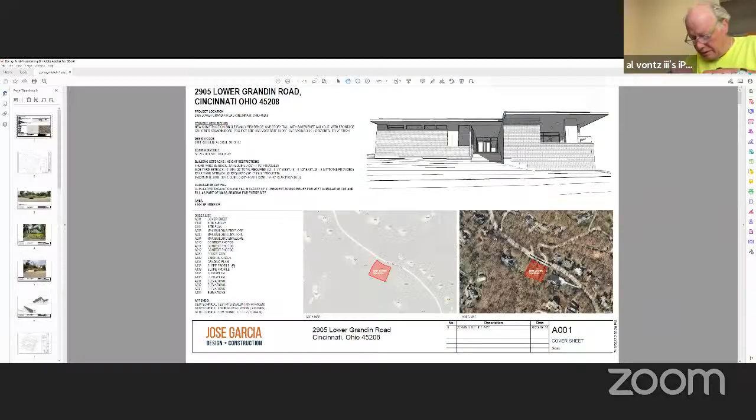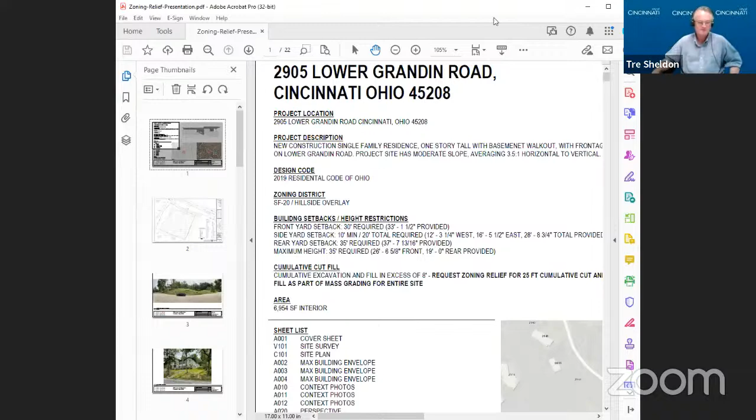Do you all see my PDF being shared currently? Yes. Yes, I do. Yes, we can.

Again, my name is Noah Schroyer, an architect at Jose Garcia Design and Construction, and the project manager for this project at 2905 Lower Grandin. We are respectfully requesting relief from 1433-19G, the 8-foot permitted cut and fill requirement, as adhering to it would make the site unviable for construction.

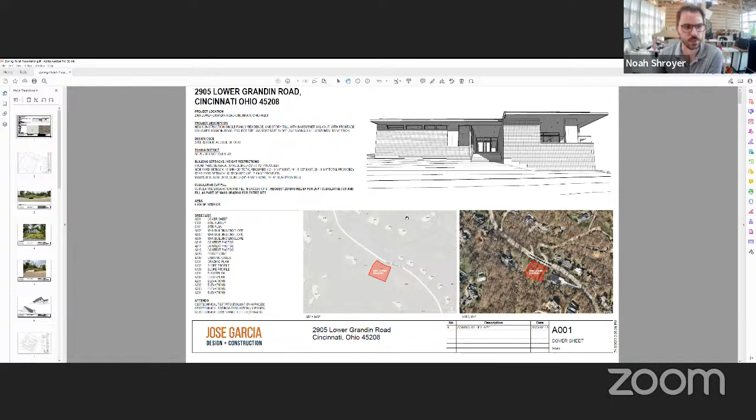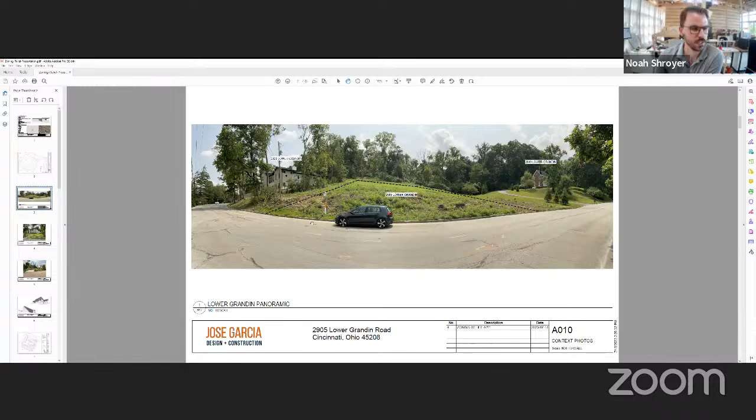Just a quick look at the existing conditions in the survey here. The property is located just south of Lower Grandin between two vacant panhandle lots. This panoramic here shows looking from Lower Grandin south to the site. It's currently a vacant property. The neighboring property to the west, 2869 Lower Grandin, sits atop a plateau, while the neighbor to the east, 2929 Lower Grandin, makes use of various retaining walls to site the house into the hillside and work with their driveway.

Our proposed project is for a new single-family dwelling. It makes use of black brick with white stone and metal accents. It is a contemporary style single-story ranch with a basement walkout. The foundation is designed to step up and work with the existing hillside.

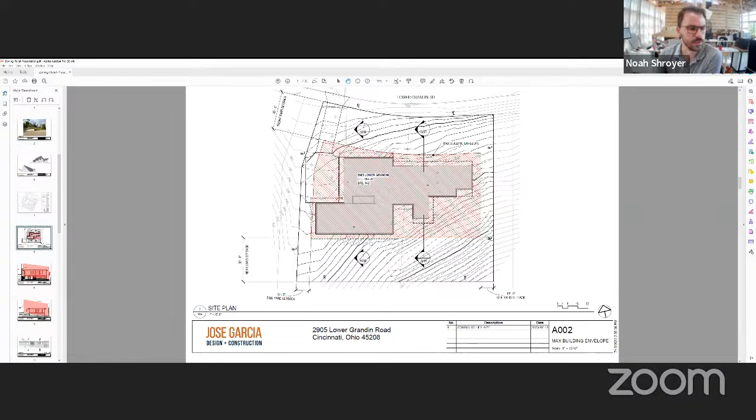The graphic on your screen now demonstrates the maximum building envelope. The red hatched area shows the area permitted to build. The setbacks come from the underlying SF20 district, as there are no structures on the adjacent lots to do setback averaging. These two cuts here, one through the basement area and one through the crawl space area, will also show conformance to the building envelope in the section.

We kept a lower profile since we're at the toe of the hill. We didn't want to detract too much from the ascension of the hillside. Here you can see hints of some of the minor grading that happens at this instance of the elevation.

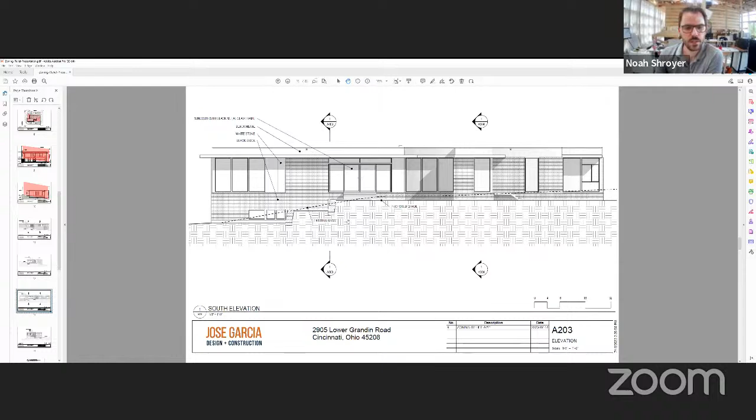This is at the rear of the house in the south. You can, again, pick up instances of the stepping to work with the progression of the hill. There are some small garden walls to permit some windows, though they are minor in height.

We have avoided rooftop utilities as well.

For the project, we've worked extensively with our geotech engineer in the design for the foundations, and also for a pier and plug wall on the site directly to the south of the house shown here. And this is done to stabilize the hillside.

So overall, we took great care and consideration in designing the house to work with the hill, avoiding any cliff-like cuts, essentially designing the house to fit the hillside as best as possible, and minimizing excavation to what is essentially the minimum for the below grade level here on the basement side, the crawl space level, and the driveway from the street.

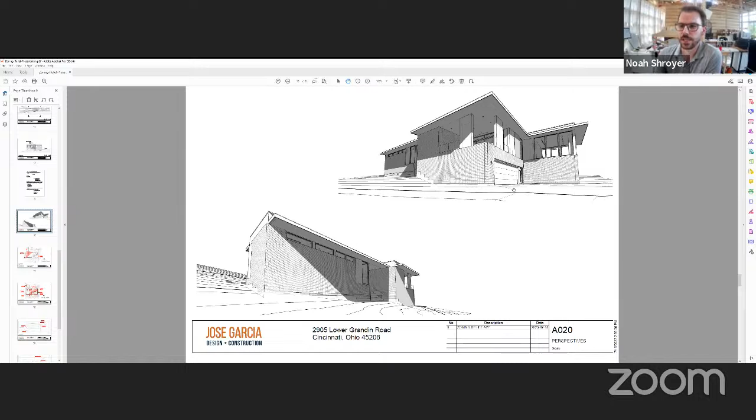So in the sum total of 33 cumulative feet of disturbance, we feel that it can be broken down into three areas: the disturbance at the driveway and the curb cuts, the cut for the house itself, and then the dirt work behind the house.

And at the rear of the house here, there's a flat gathering area established and then minor grading to maintain a 3-to-1 slope for stability purposes.

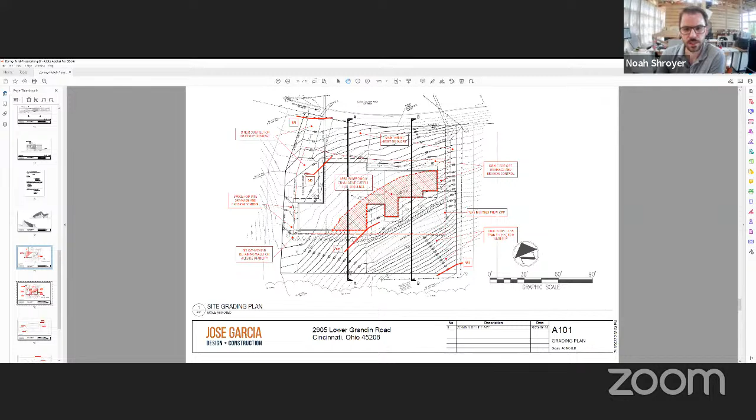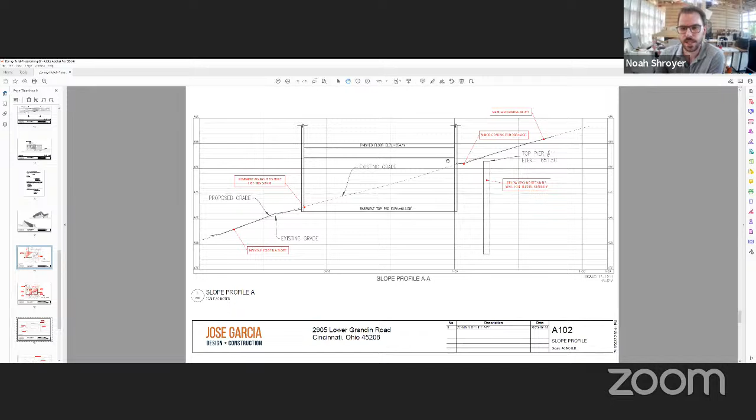It's entirely below grade. Here's the future gathering area in the rear of the house, and then the dirt work to and from it to maintain a 3-to-1 slope for stability purposes.

And in closing, the project overall meets the letter of the majority of the code requirements, asking for relief for the cut fill specifics, but meeting the spirit of the idea of a development hillside working in harmony with the hill and with the neighborhood itself.

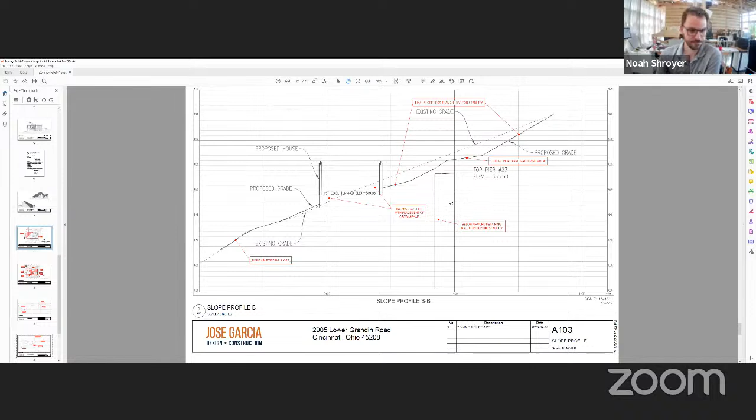Okay, thank you. I don't think I have any questions right now. I think I'll wait and we'll hear from the public first, unless Mr. Spiller wanted to add anything from the ownership side. No, thank you, I appreciate the opportunity though.

Sure, okay, we'll go to Mr. Vance. Mr. Vance, you have to unmute. Did you want to add anything? Yes, I really only had one question. I did talk to Alex Stillpass, who is my next door neighbor, contiguous property. And on Upper Grandin, there is, I don't know if we want to call it a culvert, a runoff, or a creek or whatever.

But we have an area that has water most of the time. I just want to make sure that where it goes into Lower Grandin, there's no possible impact on the drainage from that culvert, which would cause water to back up or anything else like that. We're way above, so it's not going to back up into my house, but I'm a little concerned about additional erosion on the creek, per se.